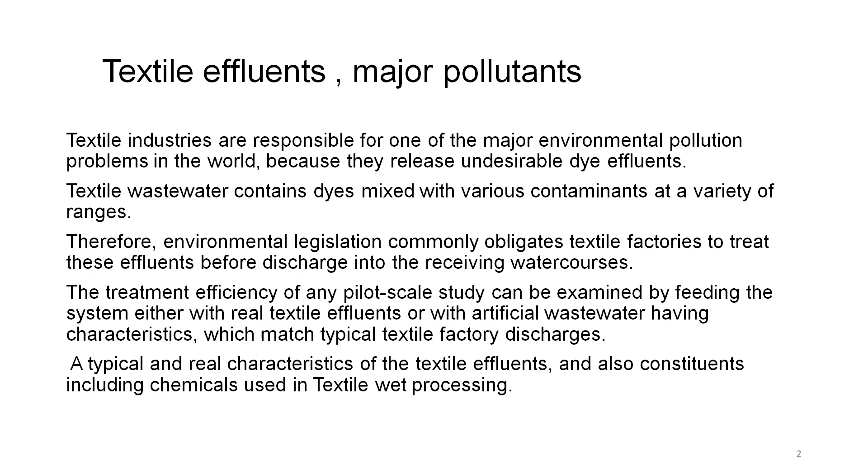A typical and real characteristic of textile effluents and also the constituents including chemicals used in textile wet processing. So, what it means is that all the chemicals that are used in the wet processing, the remnant of that which is discharged in the wastewater needs to be addressed, and those are the major pollutants and they have to be taken into account.

Textile wet processing. As textile industry is one of the largest industries in the world, and different fibers such as cotton, silk, wool as well as synthetic fibers are all pre-treated, processed, colored and after treated using large amounts of water and a variety of chemicals, there is a need to understand the chemistry of the textile effluents very well. Only when we understand the chemistry of the textile effluent, then only we can think of its remediation or any kind of treatment that is required before they are discharged from the factories.

Every country is aiming at common effluent treatment plants for the development of zero discharge solution for the bleaching and dyeing units. The total effluent treatment capacity is designed based on the mill size, based on the effluents generated in these mills. So, there are two major factors. One is the mill size and the other is the type of textile effluent that is discharged from each of these mills, because the chemical processing or the wet processing in every mill is not alike.

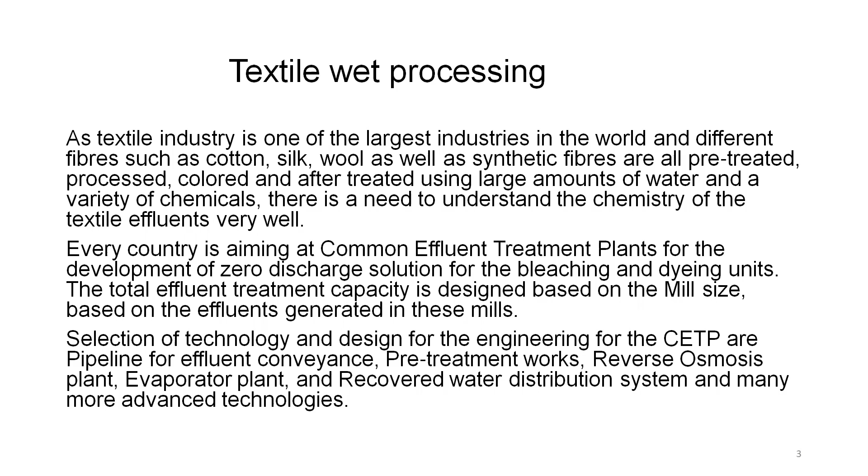You cannot say that all CETPs work on the same principles, but more or less the effluent has to be run into pre-treatment works, then reverse osmosis should be taking place, there should be an evaporator, and there should be a system for recovery of the water, and so many advanced technologies are adapted for all this.

Now, understanding textile waste characteristics is very important at this stage. The textile waste characteristic needs to be understood very clearly. Different methods and aspects of textile effluent and its management to save the environment from pollution need to be understood very clearly. Major pollutants in textile wastewaters are high suspended solids, chemical oxygen demand, heat, color, acidity, and other soluble substances whose chemistry will be emphasized.

So, one thing has to be understood, that first we have to understand what are the high suspended solids, that is the total suspended solids, TSS, and the chemical oxygen demand, the COD, because these are two major factors which are the main pollutants, and then of course comes the heat, color, acidity, and so on.

The pollutant features of textile waste differ widely among various organic substances such as dyes, starches, and detergents in effluent, which undergo chemical and biological changes which consume dissolved oxygen from the receiving stream and destroy the aquatic life. So, they use the oxygen which is dissolved in the water bodies, thereby not making it available for aquatic animals in that water stream, and therefore they start dying, and that is how the aquatic life gets destroyed.

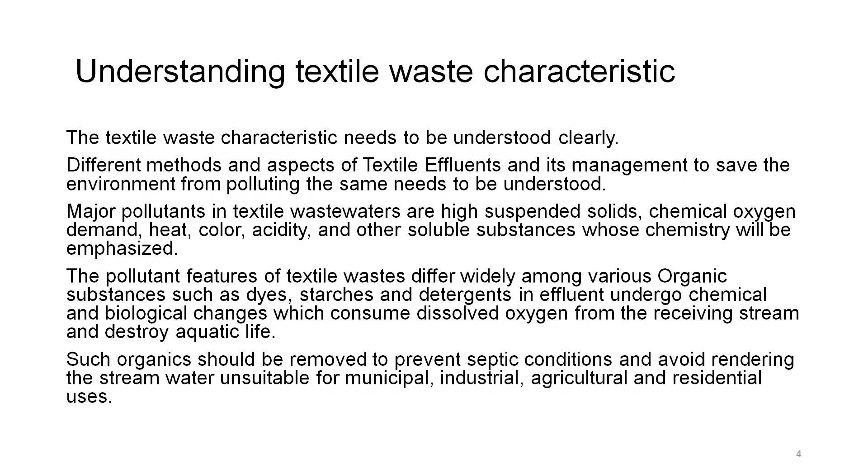Such organics should be removed to prevent septic conditions and avoid rendering the stream water unsuitable for municipal, industrial, agricultural, and residential uses. So, we have to keep in mind that as long as these dyes are present, or these detergents are present, or these starches are present in the effluent, they are not going to let the dissolved oxygen be available for aquatic life, and therefore they will create a septic condition, and the water will not be suitable for municipal or industrial or agricultural or residential uses.

Now, let us understand what are the harmful chemicals that are used in textile industry. The common question would be, why do we use them? We use them because they are mandatory to be used for certain wet processes. Hence, we cannot eliminate them completely. However, we can reduce the quantities or look for a remediation in the effluent.

So, among the list of harmful chemicals that are used in textile industry, detergents, mainly nonyl phenol ethoxylates, generate toxic metabolites which are poisonous to fish. Stain removers carry solvents like carbon tetrachloride, which can cause ozone depletion. Oxalic acid used for rust stain remover is toxic to aquatic organisms, and also they boost the COD, that is the chemical oxygen demand.

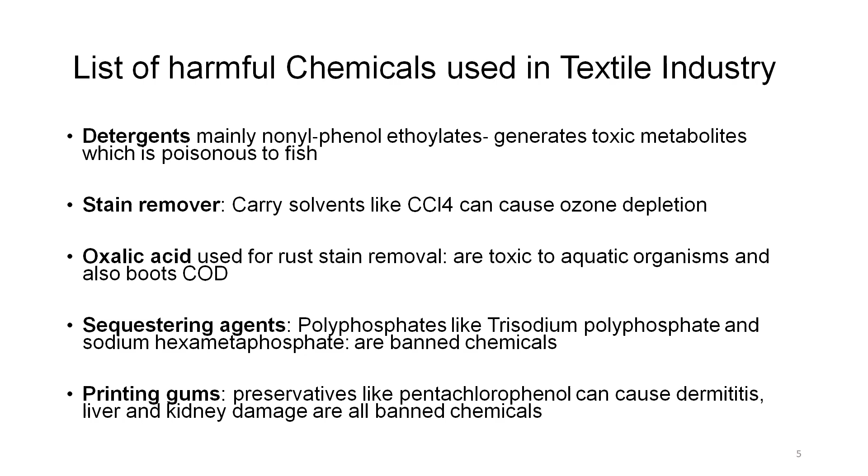Sequestering agents like polyphosphates of the type trisodium polyphosphate and sodium hexametaphosphate are banned chemicals, yet they have to be sometimes used. Printing gums, preservatives like pentachlorophenol can cause dermatitis, liver and kidney damage, and are also banned chemicals, but sometimes these chemicals have to be used.

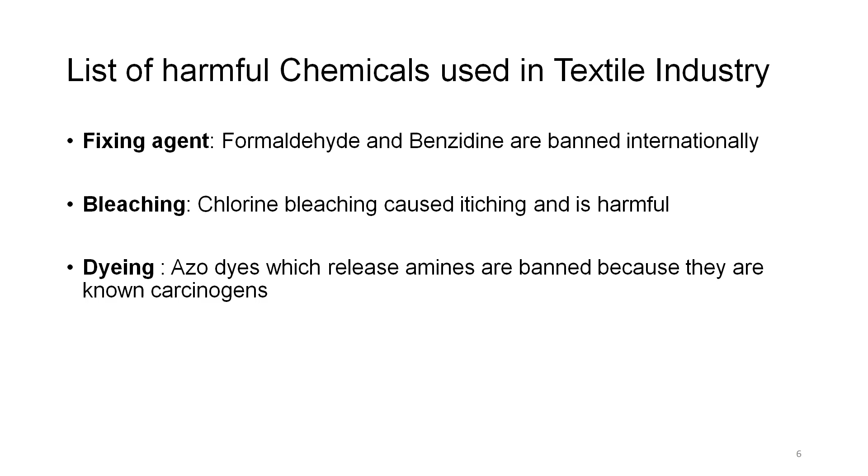Among the other list of harmful chemicals are fixing agents. In the category of fixing agent, formaldehyde and benzidine, which are banned internationally, are also very crucial. Bleaching agents like chlorine bleach can cause itching and are harmful. Dyes, the azo dyes which release amines, are banned because they are known carcinogens. And why are they known carcinogens? Because they release primary amines after the breaking of the azo N double bond N, and these amines are highly toxic.

Textile effluent or wastewater, we will call it in abbreviation TWW. Textile wastewater is one of the most important hazardous wastewaters for ecosystems when it is discharged directly into water streams without proper treatment. Textile effluent is heavily contaminated with pollutants such as dyes, dissolved solids, suspended solids and toxic metals. The main factor to be considered in textile effluent is the total dissolved solids, that is TDS. Because of the use of common salt and Glauber's salt, the level of TDS increases in textile wastewater.

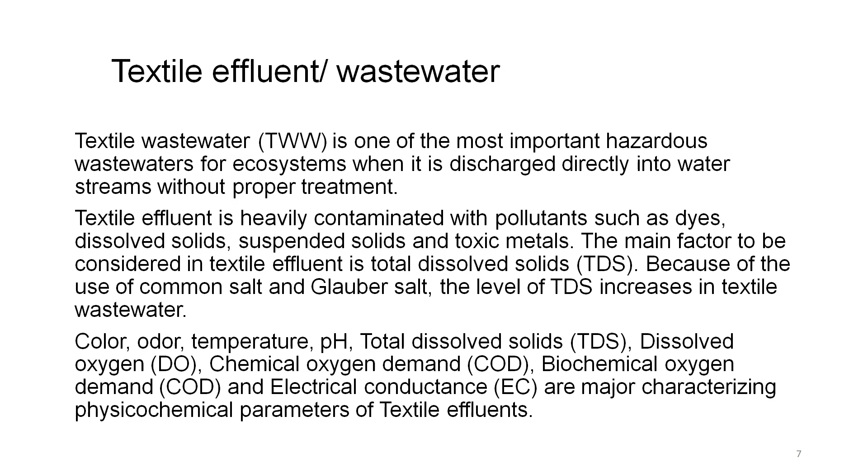Color, odor, temperature, pH, total dissolved solids (TDS), dissolved oxygen (DO), chemical oxygen demand (COD), biochemical oxygen demand (BOD), and electrical conductance (EC) are major characterizing physicochemical parameters of the textile effluents, which need to be tested before this water is discharged into the water bodies.

Now, what is textile effluent? Let us try to understand very carefully the meaning of that and what textile effluent brings along with it, its characteristics. Textile effluent refers to wastewater discharged from textile manufacturing processes. It contains various chemical substances, dyes and pollutants derived from the production of textiles, including fabric, garments and other textile products. So, any type of textile product will have to go through wet processing, and if it goes through wet processing, it is bound to generate textile effluent. So, if we are making fabric or garments or textiles for any other use, textile effluent will be generated.

Textile effluent is a significant environmental concern due to its potential to pollute water bodies, harm aquatic ecosystems and pose risk to human health. The key aspect related to textile effluent is its composition: textile effluent comprises a complex mixture of organic and inorganic compounds, including dyes, heavy metals, solvents, salts, acids, alkalis and other chemicals used in textile processing. These substances can have detrimental effects on the environment and human health if not properly treated before discharge. So, it is a very serious matter. These chemicals, although very useful in textile processing, can be extremely harmful to human health.

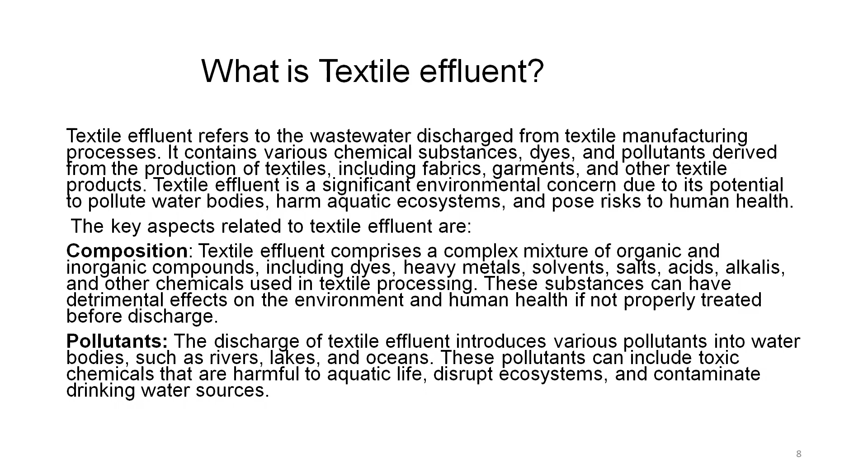Then come the pollutants. Textile effluent, when discharged, introduces various pollutants into water bodies such as rivers, lakes and oceans. These pollutants can include toxic chemicals that are harmful to aquatic life, disrupt ecosystems and contaminate drinking water sources as well as sometimes soils.

Environmental impact caused by TWW, that is textile wastewater. Textile effluent contributes to water pollution, which can have far-reaching environmental consequences. It can degrade water quality, affect biodiversity, disrupt aquatic ecosystems and harm organisms which are living in or are dependent on the affected water bodies like the river, the ocean and the lake.

Health risk: exposure to untreated textile effluent or contaminated water sources can pose health risks to both humans and animals. Chemicals present in textile effluent such as heavy metals and dyes may have toxic effects and can accumulate in the environment and food chain, potentially causing adverse health effects. So, it has serious implications. We cannot take this lightly, and hence understanding the nature and characteristics of textile effluent is very important.

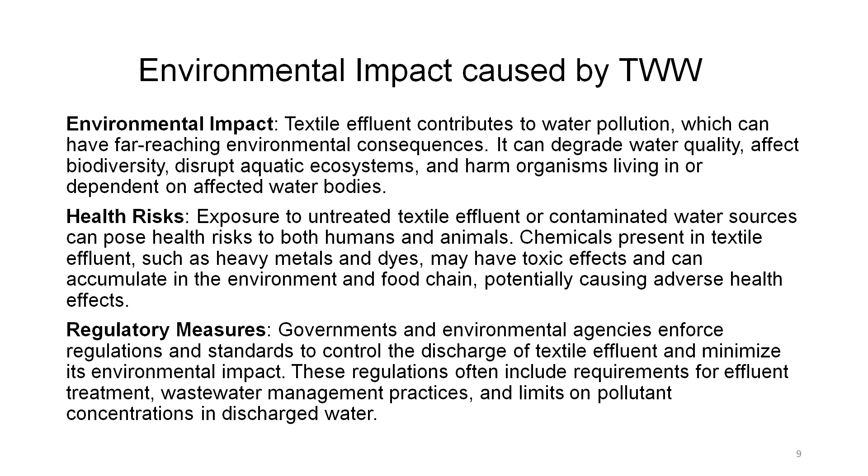Regulatory measures: governments and environmental agencies enforce regulations and standards to control the discharge of textile effluent and minimize its environmental impact. These regulations often include requirements for effluent treatment, wastewater management practices and limits on pollutant concentration in discharge water. So, they have made rules as to what is permissible, how much should be remaining in the water before it is discharged. That is, there is a stipulated value for each of these chemicals which are known pollutants in the effluent. Then only we can think of treatment technologies.

So, there are several treatment technologies. Various treatment technologies are available to treat textile effluent before discharge. These include physical, chemical and biological processes aimed at removing or neutralizing pollutants and contaminants present in the wastewater. Common treatment methods include sedimentation, filtration, chemical precipitation, biological treatment such as activated sludge processes, and advanced oxidation processes.

So, newer and newer methods are being developed for the treatment of textile effluent, because as long as man exists on this earth, textiles will be required, textile processing cannot be stopped, and textile processes are going to use chemicals which are eventually harmful for humans or even animals.

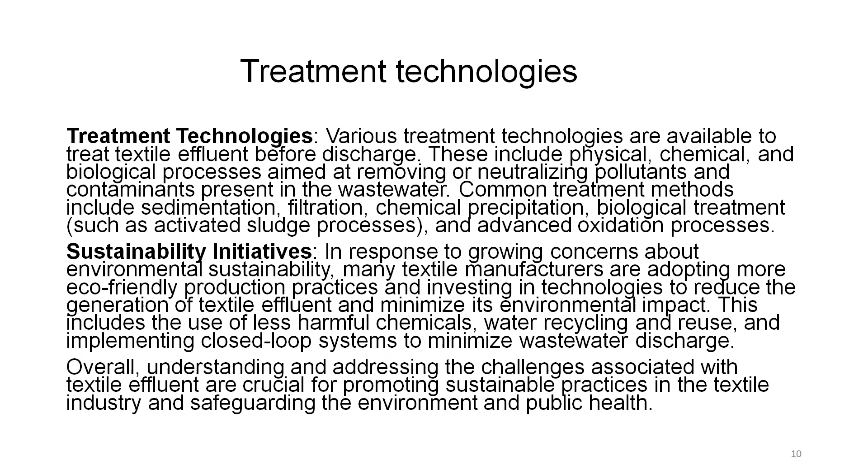So, in order to understand this, one thing is clear, that treatment technologies and sustainability initiatives have to be done, because then only these contaminants can be overcome and removed. The wastewater characteristics of textile effluent should be understood, and in order to understand, let us go one by one.

The wastewater characteristics of textile effluent can vary depending on the specific processes involved in textile manufacturing, as well as factors such as types of fibers, dyes and chemicals used. However, textile effluent typically exhibits certain common characteristics. That means we have certain common characteristics which are always present in textile effluent, and there are some specific chemicals which are used for specific processing. Let us first look at the typical common characteristics of textile effluent.

One is color. Textile effluent is often highly colored due to the presence of residual dyes and pigments from dyeing and printing processes. The color intensity can range from pale hues to vibrant shades depending on the type and concentration of dyes used. And this is very apparent. One can look at the effluent and say, okay, it is very highly colored or less colored.

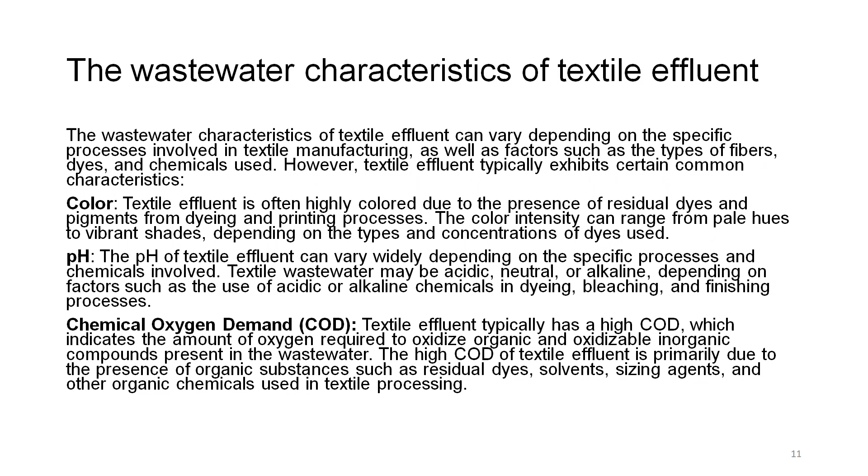Main parameters that need to be checked: biochemical oxygen demand, BOD. BOD measures the amount of dissolved oxygen consumed by microorganisms while decomposing organic matter in the wastewater. Textile effluent often has high BOD due to the presence of biodegradable organic compounds such as starches, sugars and cellulose derived from natural fibers and processing chemicals. Then comes total suspended solids, TSS.

Textile effluent may contain suspended solids such as fiber, lint, dye particles and other particulate matter generated during various manufacturing processes. TSS levels can vary depending on factors such as the type of textile production, equipment used and wastewater treatment practices.

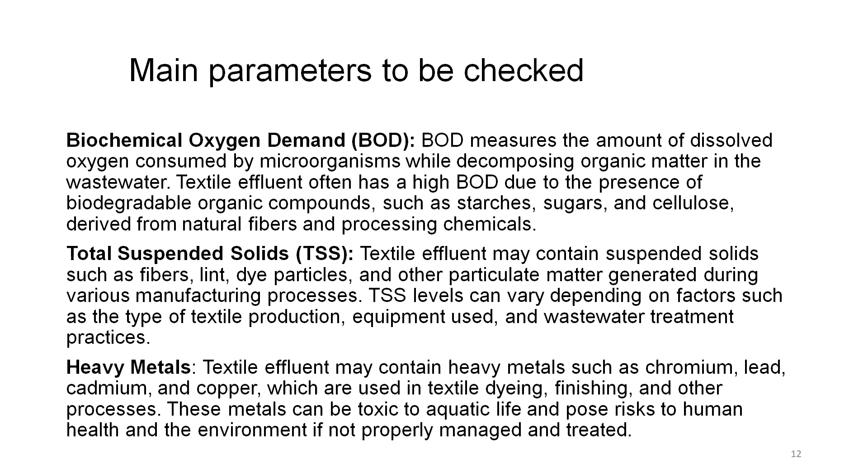Heavy metals. Textile effluent may contain heavy metals such as chromium, lead, cadmium and copper, which are used in textile dyeing, finishing and other processes. These metals can be toxic to aquatic life and pose risk to human health and environment if not properly managed and treated. So, this is quite serious because heavy metals are going to create even more serious problems in the textile effluent, particularly for aquatic life as well as for human health. They damage the environment terribly.

Salinity and TDS. Salinity and total dissolved solids, that is the TDS, in textile effluent may have elevated levels of salts and dissolved solids, particularly if salt based chemicals such as sodium chloride are used in processes like dyeing and printing. Often as an equilibrating agent, sodium chloride is added during dyeing. High salinity and TDS levels can affect water quality and soil fertility if discharged untreated into the environment.

Toxic chemicals. Textile effluent may contain various toxic chemicals such as formaldehyde, chlorinated compounds, aromatic amines and other hazardous substances used in textile processing. These chemicals can pose risk to human health and environment if not properly controlled and treated. So, again and again I am bringing up this problem of human health and environmental damage due to textile effluent. It is a serious matter and we need to understand the characteristics and the nature of textile effluent in order to find a solution.

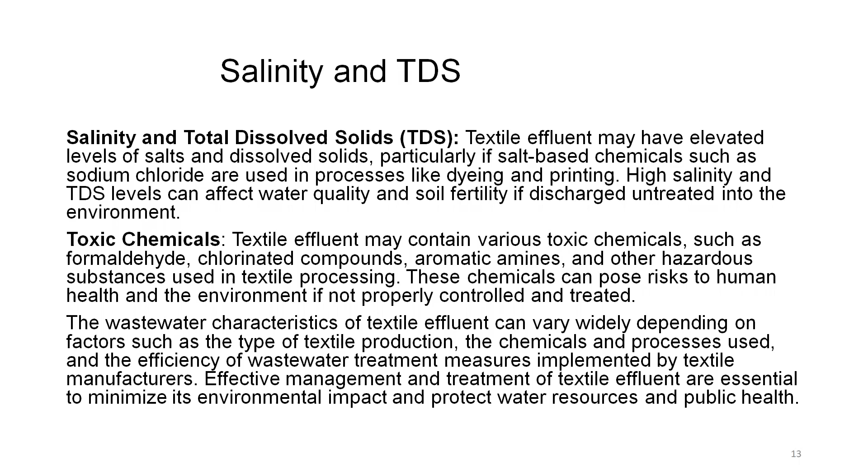The wastewater characteristics of textile effluent can vary widely depending on factors such as the type of textile production, the chemicals and processes used, and the efficiency of wastewater treatment measures implemented by textile manufacturers. So, what it means is that any textile manufacturer will now have to look at wastewater treatment measures more seriously than before because of the legislation laid down by the Environmental Ministry. Effective management and treatment of textile effluent are essential to minimize its environmental impact and protect water resources and public health.

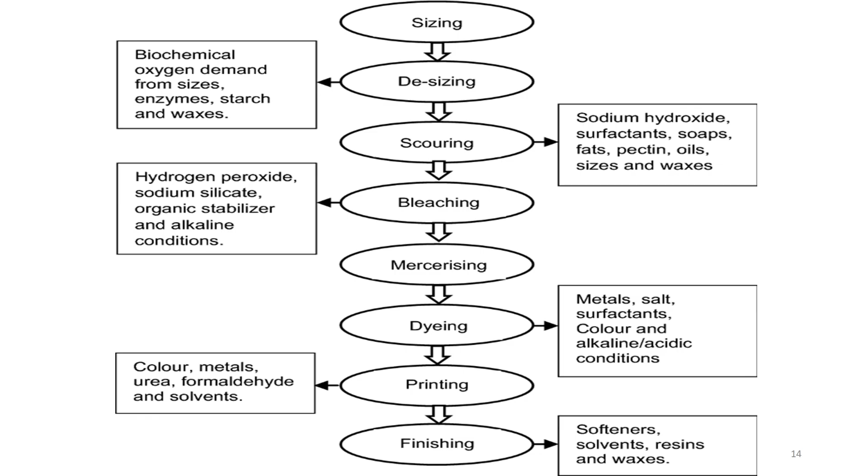In dyeing, we have metals, salt, surfactant, colors and alkaline or acidic conditions. In printing, we have color, metal, urea, formaldehyde and solvents, and as finishing agents, we have softeners, solvents, resin and waxes. So many different varieties of chemicals are used in the wet processing of textiles. Hence, the composition of textile effluent is to be understood from the mill's production point of view. The effluent discharged from textile factories is a mixture of dyes, metals and other pollutants.

The colorants can be divided into natural and synthetic dyes. Synthetic dyes are produced easily in different colors and characterized by their fastness, which makes them more widely used than natural dyes. Synthetic dyes are classified according to their chemical structure, that is azo, anthraquinone, sulfur, phthalocyanine and triarylmethane, and according to their mode of application they can be reactive dyes, direct dyes, disperse dyes, basic dyes or vat dyes.

Dye effluents are high in color, pH, suspended solids, that is SS, chemical oxygen demand, that is COD, biochemical oxygen demand, that is BOD, and salts. So, this is more or less the composition of textile effluent. One component may be higher, another lower, from mill to mill, but in general the dye effluent will be colored. It could be highly colored or less colored, it will have pH, it will have suspended solids because of the dissolved and suspended solid material, and it will have high COD and BOD. These are more or less the common characteristics of textile effluent composition.

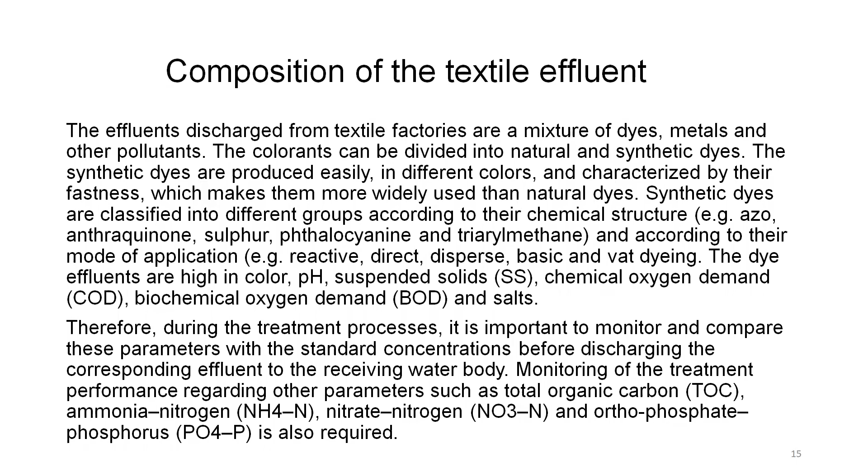Therefore, during the treatment processes, it is important to monitor and compare these parameters with the standard concentrations before discharging the effluent to the receiving water body. Monitoring of treatment performance regarding other parameters such as total organic carbon, that is TOC, ammonia nitrogen, NH4-N, nitrate nitrogen, NO3-N, and orthophosphate phosphorus, PO4-P, is also required simultaneously.

Textile wastewater problem. Treatment of this is very important. If we do not treat the textile wastewater, it will definitely increase the waste. Hence, we need to treat the wastewater, which will reduce, prevent and make positive effects on its further uses. It can be recycled if it is purified enough and if it does not have any

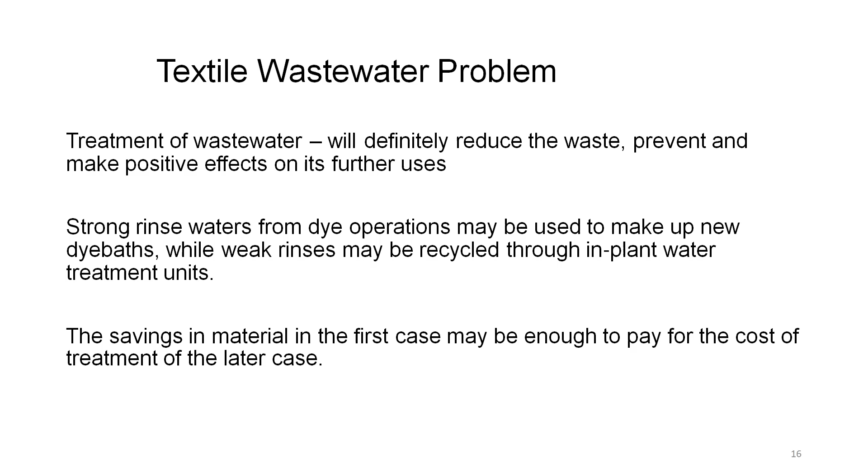color remnants. Strong rinse water from dye operations may be used to make up new dye bath, while weak rinses may be recycled through in-plant water treatment units. So, depending on whether they are high in color or low in color, their recycling or treatment strategies can be changed. The savings in material in the first case may be enough to pay for the cost of the treatment of the latter case, which means that whatever money is involved in recycling can be compensated if we use the highly colored discharges for making new dye baths and adjusting the color concentration through color scan machine.

Chemicals that are used in textile industry, that is synthetic organic dyes, bleaching and detergents. Some chemicals are biodegradable such as starch, however, others such as dyes are non-degradable. Thus, the effluent could have lower dissolved oxygen concentration, which means they will cause higher BOD and COD. Solids in textile wastewater come from fibrous substrates and process chemicals, thus disturb the aquatic life by slowing oxygen transfer

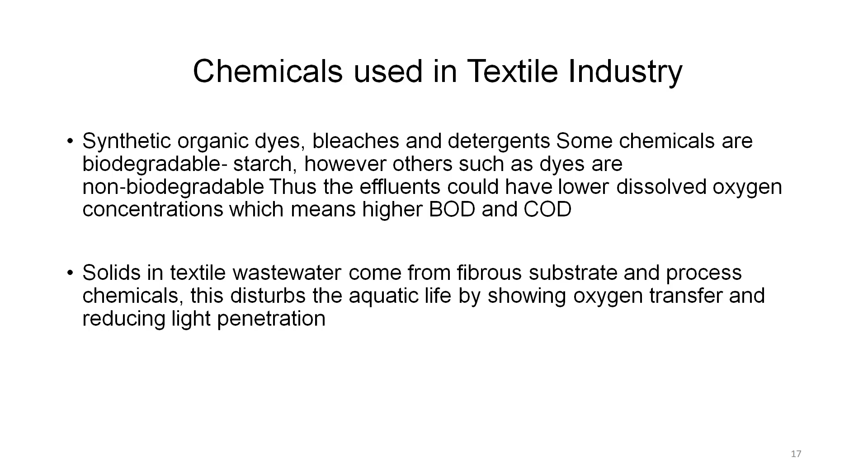and reducing light penetration. So, if the water has too much of dissolved solids, it will not let the sunlight penetrate through the water body. As a result, aquatic plants may not get enough light to carry out their photosynthesis, and therefore, they will die or they will become pale. Therefore, it is necessary that the salt should be removed, the TSS should be lowered.

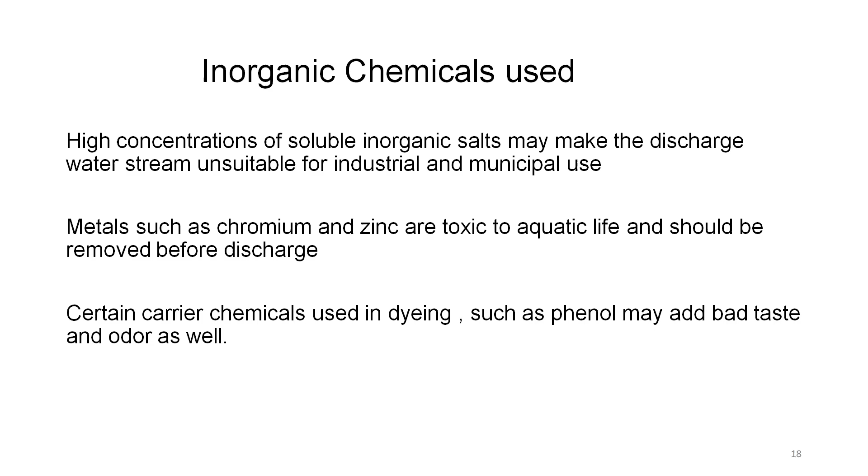Inorganic chemicals used. High concentration of soluble inorganic salts may make the discharge water stream unsuitable for industrial and municipal use. Metals such as chromium and zinc are toxic to aquatic life and should be removed before discharge. Certain carrier chemicals used in dyeing such as phenol may add bad taste and odor. So, we have to see what are the chemicals that can be reduced if not removed completely from the processing system.

Therefore, we understand that treatment of textile effluent is mandatory, is essential. Typically, textile effluent would involve the following steps. Reactive dye concentrates can be treated in a conventional anaerobic digester. Exposure to the biomass to achieve decolorization and tolerance of microorganisms to concentrations of the dye. So, there are methods of treatment, but the method of treatment has to be chosen according to the kind of composition of the effluent that is present.

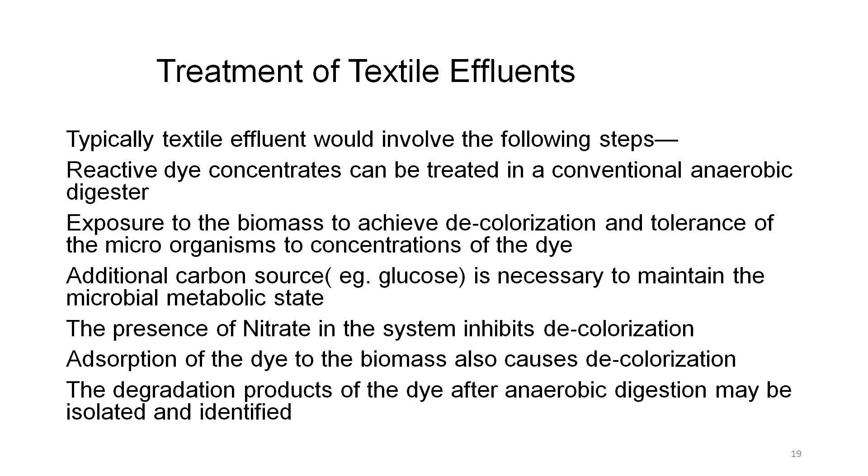Additionally, carbon source such as glucose is necessary to maintain the microbial metabolic state. The presence of nitrate in the system inhibits decolorization. Adsorption of dye to the biomass also causes decolorization. The degradation products of the dye after anaerobic digestion may be isolated and identified. So, there is more complexity to it. It is not so simple to remove all these very easily with a twist of the finger. It is not like magic. It needs concerted planning, and the treatment plan is based on the composition of the textile effluent of that mill. There is no universal formula.

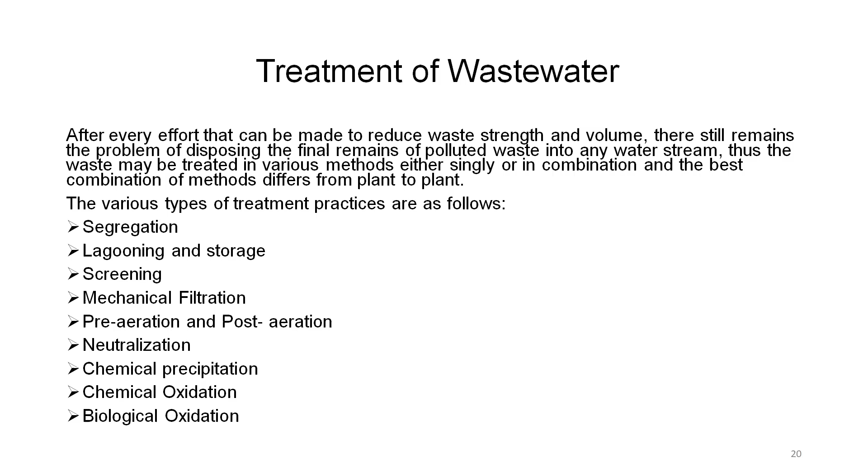So, in the treatment of the wastewater, after every effort that can be made to reduce waste strength and volume, there still remains the problem of disposing the final remains of polluted waste into any water body. Thus, the waste may be treated in various methods, either singly or in combination, and the best combination of methods differs from plant to plant. The various types of treatment practices that are followed are segregation, lagooning and storage, screening, mechanical filtration, pre-aeration and post-aeration, neutralization, chemical precipitation, chemical oxidation and biological oxidation. So, one can choose one of the methods, or one can use several of the methods. That discretion is left based on the composition of the textile effluent.

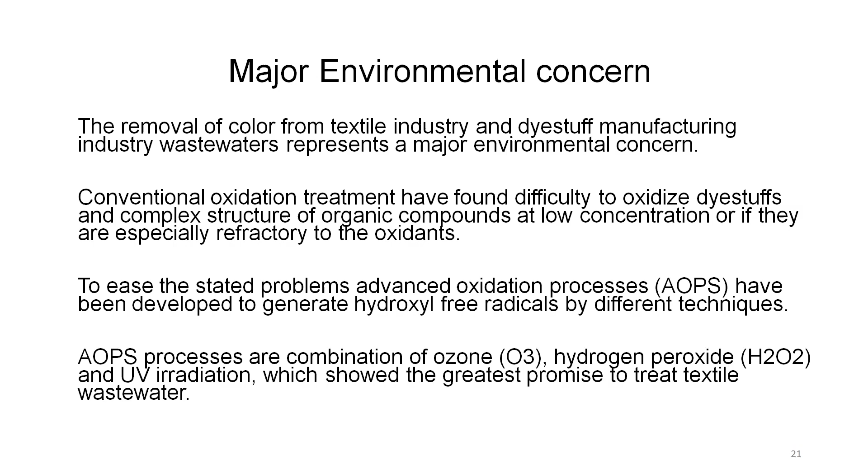Major environmental concern: the removal of color from the textile industry and dyestuff manufacturing industry wastewaters represents a major environmental concern. Conventional oxidation treatments have found difficulty to oxidize dyestuffs and complex structures of organic compounds at low concentration, or if they are specially refractory to the oxidants. To ease the stated problem, advanced oxidation processes, that is AOPs, have been developed to generate hydroxyl free radicals by different techniques. AOPs are combinations of ozone, that is O3, hydrogen peroxide H2O2 and UV radiation, which showed the greatest promise to treat textile wastewater. So, among various processes, the advanced oxidation processes show a lot of promising results in terms of treatment of textile effluent.

Currently, what are the practices which are being practiced in the textile industry to reduce the pollutants in the textile effluent? The textile dyeing industry is under considerable pressure to reduce the color of the process water directly discharged to municipal water treatment facilities. Two common approaches are practiced.

One is the electrochemical treatment by anodic oxidation, using anodes with catalytic coatings to oxidize the dye waste, and the second one is ion exchange zeolite treatment with different cations such as Fe2+, Fe3+, Cu2+; clinoptilolite, a natural zeolite, has been found to be quite effective.

Since the catalytic Fe2+ sites are bound to the zeolite structure, no sludges are formed, and the cations released to the solution during the organometallic dye degradation were found to be absorbed by the zeolite. So, here there is an advantage that the zeolite structure is so beautiful that whatever is being precipitated is actually absorbed by the zeolite.

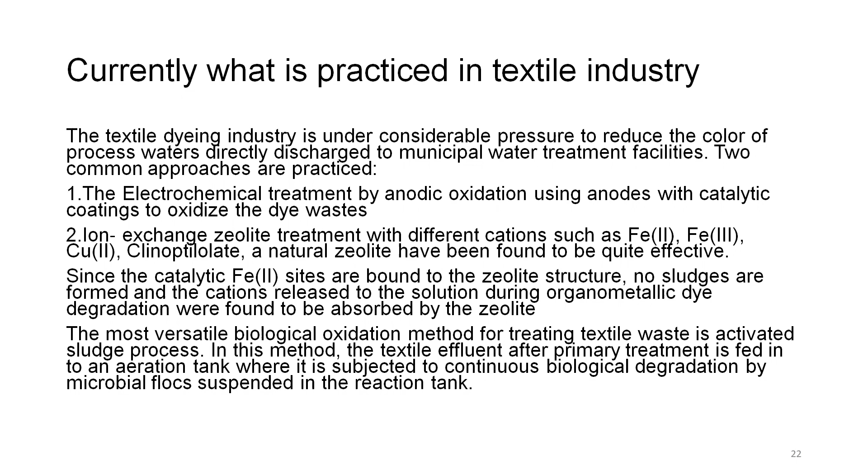Commonly combined for the treatment of effluents. As I stated earlier also, no single process is foolproof, that we do one process and the water will become colorless, odorless, and will have neutral pH and all of the qualities that unused water is having. Therefore, sometimes we have to use a combination of methods.

The textile industry uses a significant volume of fresh water throughout all processing operations, dyeing, bleaching, washing, while it contributes to freshwater pollution during the thorough washing of the fabric to remove chemicals. So, it is contributing continuously; fresh water is not remaining fresh water any more.

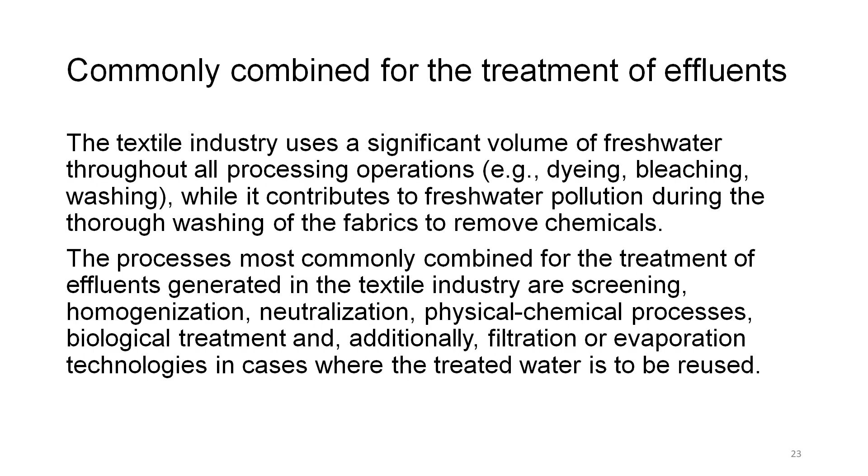The processes most commonly combined for the treatment of effluent generated in the textile industry are screening, homogenization, neutralization, physical and chemical processes, chemical treatment, biological treatment, and additionally filtration or evaporation technologies in cases where the treated water is to be reused. So, there are several techniques one after the other in combination which are used for the treatment of the textile effluent.

A correct design of wastewater treatment system. So, what should be the correct design of the wastewater treatment system for the textile industry? It should meet certain objectives: adapt the wastewater to the discharge limits. This is being set up by the regulatory body.

Reuse water in different textile manufacturing processes, that is washing, dyeing, heat treatment, as well as for cleaning operations, irrigation, etc. To recover raw material dissolved in the wastewater such as pigments or dyes, to reduce operating costs of the production process, to reduce the environmental impact of the business activities. So, all put together, it becomes a good or a correct design for a wastewater treatment system.

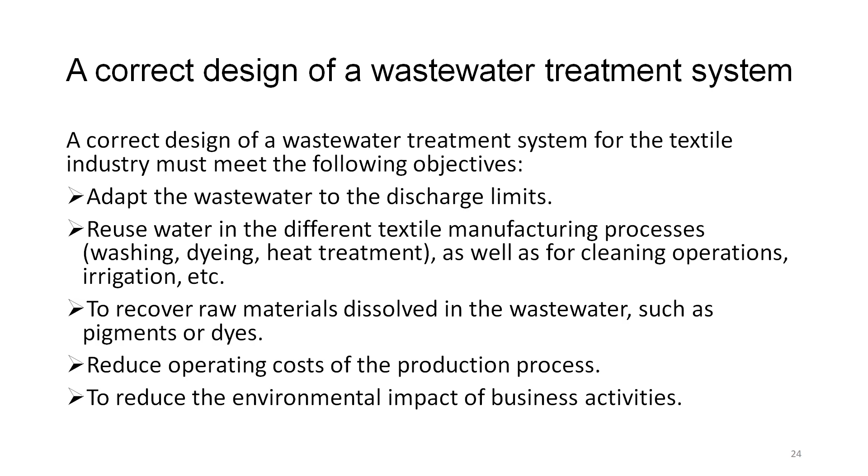Now, what is the main culprit? Which one is the most difficult to be removed? The plants for the treatment of wastewater generated in the textile industry involve various technologies, since the diversity of pollutants present in the effluent cannot be treated by a single technology. This we have understood so far.

Wastewater from the textile industry is characterized by the large amount of reagents applied in its production processes, most of which are non-biodegradable and persistent in the medium, especially the aqueous medium. The pigments used are highly contaminating agents, as they are manufactured to offer high durability and resistance to biological degradation.

Up to 200,000 tons of pigments and colorants can be lost annually in the manufacturing process if the water is not efficiently treated. It is for this reason that it is increasingly important to implement circular economy solutions that enable the reuse of wastewater and the recovery of raw material dissolved in effluents.

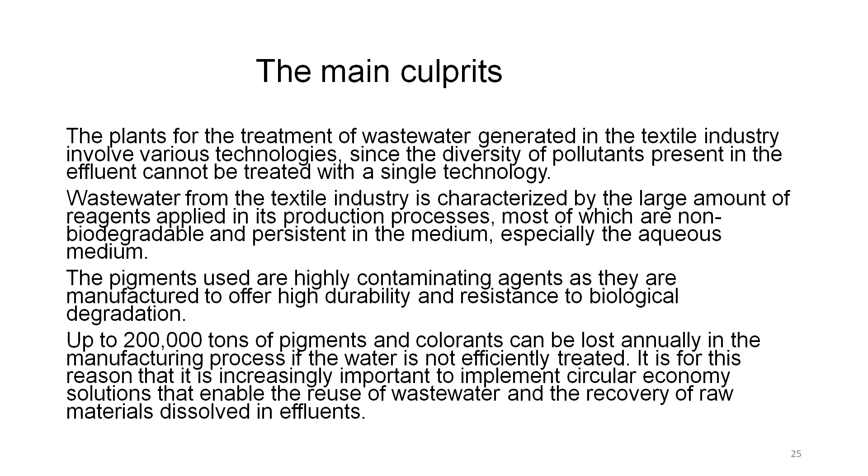Now, this is a very serious issue, that such a large amount of pigments and colors are still remaining in the textile effluent, and if they are not recovered, we definitely cannot talk about circular economy. And in today's time, every bit of restoration can change the entire business model of that mill, and therefore, it is very important to look at the recovery of these chemicals which can be reused in due course of time. So, what are the types of textile wastewater treatment?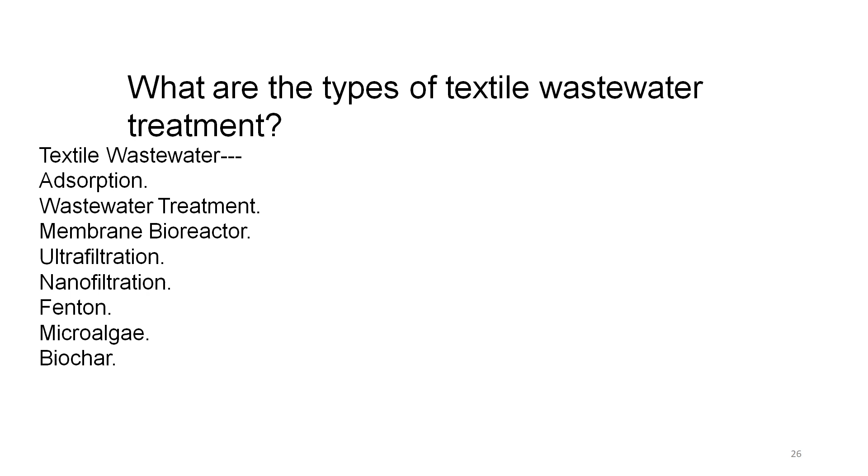Textile wastewater can be treated by adsorption, wastewater treatment, membrane bioreactor, ultrafiltration, nanofiltration, Fenton oxidation, microalgae and biochar. So, these are various different types of treatments that are commonly practiced either in isolation or in combination.

How can you reduce the usage of water in textile production sustainability? Now, there are two things: either we use large amount of wastewater and recover it, or we use water sparsely so that less effluent is generated, less treatment is required. Choose low water fabrics, use waterless dyeing methods, recycle and reuse water, implement water management practices, educate and engage stakeholders. Here is what else to consider.

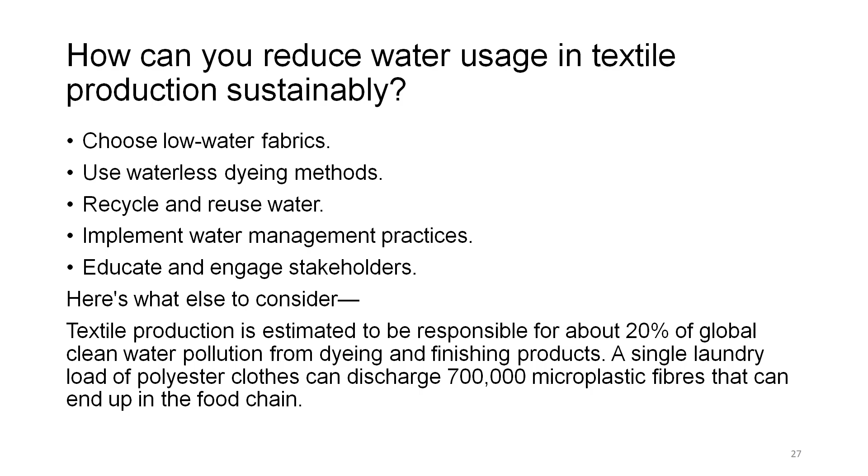Textile production is estimated to be responsible for about 20% of global clean water pollution from dyeing and finishing products. A single laundry load of polyester clothes can discharge 700,000 microplastic fibers that can end up in the food chain. So, you imagine that such is the manifestation of the textile effluent, and if it is not managed, it can be a serious environmental problem.

Use waterless dyeing methods. Dyeing is one of the most water intensive stages of textile production, as it involves rinsing, washing and disposing of wastewater that contains chemicals and pollutants, and the processing chemicals. However, there are alternative methods that can reduce or eliminate the need of water in dyeing, such as air dyeing, digital printing or supercritical carbon dioxide dyeing.

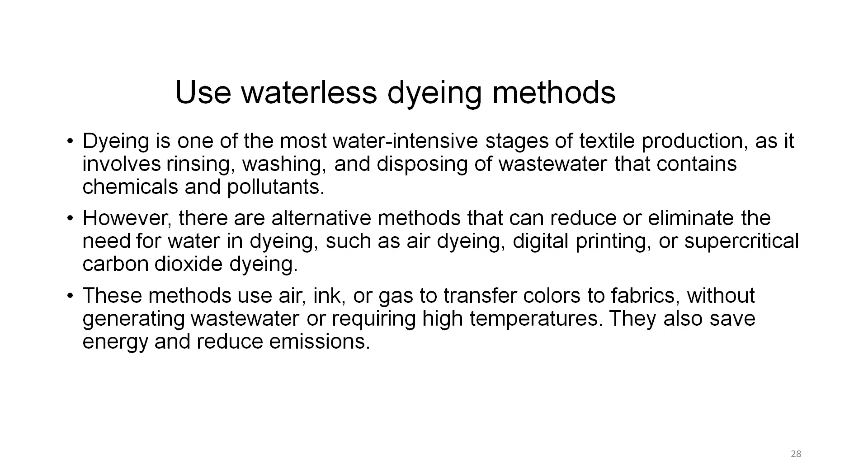Now, here the water demand itself is very low. Therefore, very small amount of effluent will be generated, or there will not be any effluent generated at all. These methods use air, ink or gas to transfer colors to the fabric without generating wastewater or requiring high temperatures. They also save energy and reduce emission. So, switching to waterless dyeing methods is definitely advantageous in reducing the textile effluent water pollution.

Implement water management practices. Besides using less water or reusing water, you can also implement water management practices that can help you monitor and optimize your water consumption and efficiency. For example, you can conduct a water audit to assess how much water you use, where you use it and how you can reduce it. You can also set water reduction targets and track your progress.

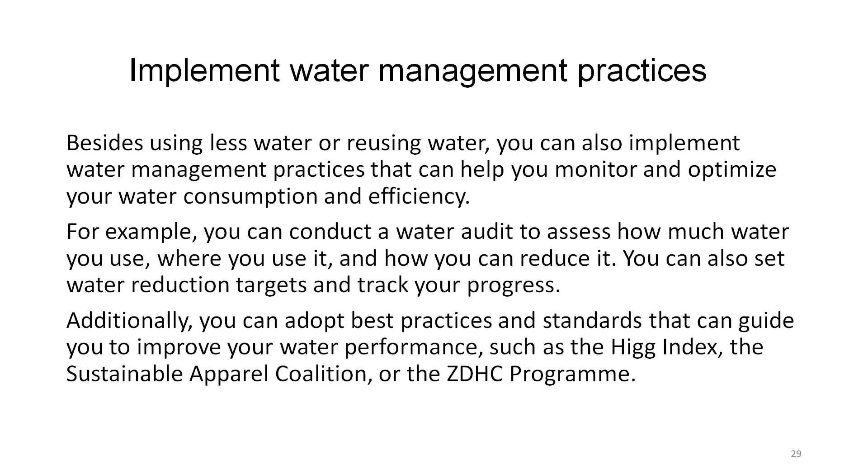Additionally, you can adopt best practices and standards that can guide you to improve your water performance, such as Higg Index, the Sustainable Apparel Coalition, or the ZDHC program, that is Zero Discharge program. Guide to Improve Water Program. Higg Index. Higg Index is a suite of 5 tools that assess and measure the social and environmental performance of the value chain and the environmental impact of products. We develop these tools to help organizations make systematic change by identifying, understanding, and measuring areas of improvement.

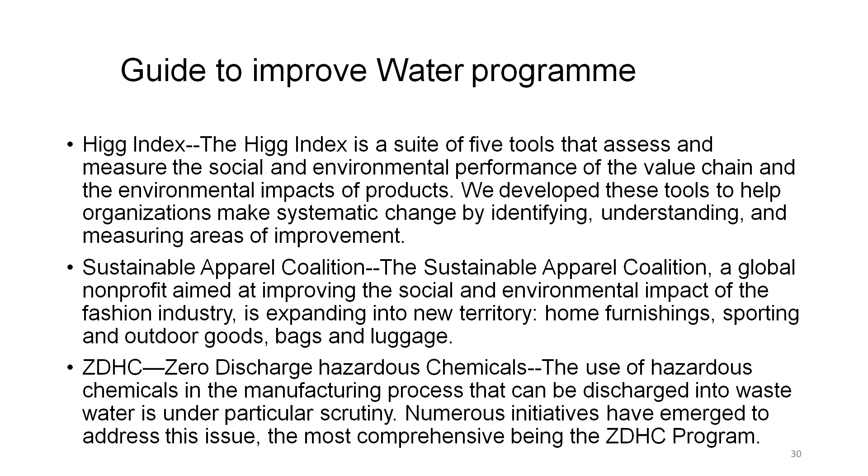Sustainable Apparel Coalition. The Sustainable Apparel Coalition, a global non-profit aimed at improving the social and environmental impact of the fashion industry, is expanding into new territory: home furnishing, sporting and outdoor goods, bags and luggage. Zero Discharge of Hazardous Chemicals, that is ZDHC. The use of hazardous chemicals in the manufacturing process that can be discharged into wastewater is under particular scrutiny. Numerous initiatives have emerged to address this issue, the most comprehensive being the ZDHC program.

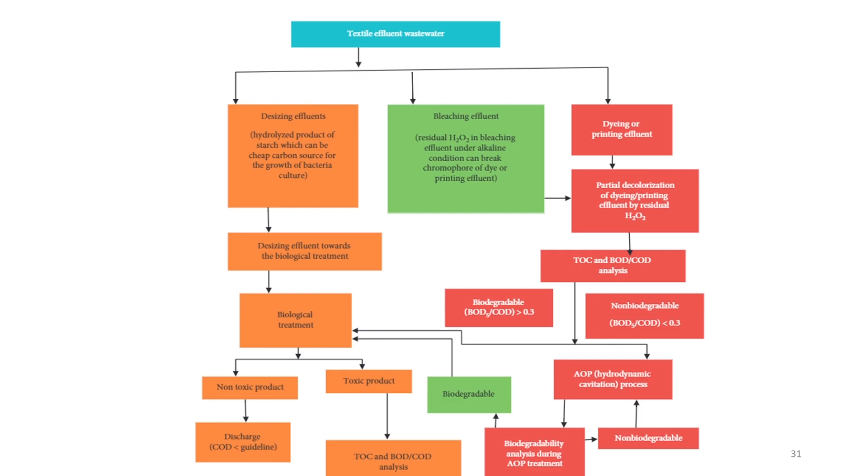So, this is the kind of layout where you have effluent from desizing, from bleaching, from dyeing, and then they are treated differently, but the most effective one is the AOPs, which is the advanced oxidation processes, and through that we get biodegradable and non-degradable products, which then finally need to be checked and removed. So, design appropriate wastewater treatment technologies which are removing effluent from the wastewater of textile factories to mitigate water pollution.

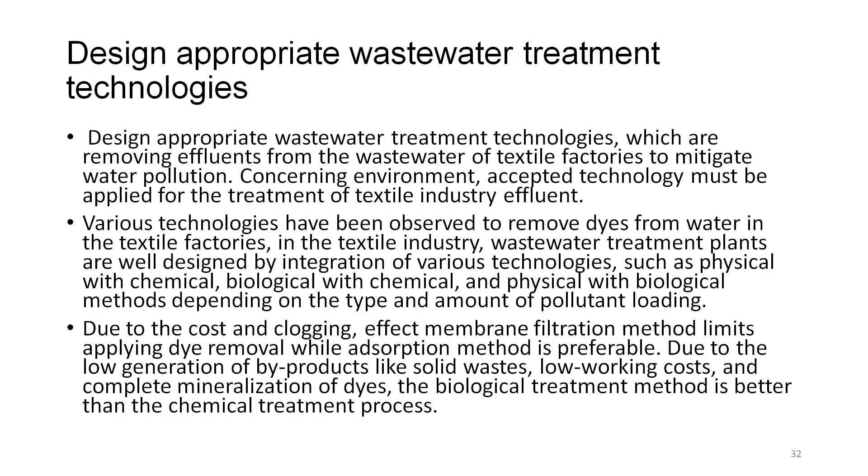Concerning environment, accepted technology must be applied for the treatment of textile industry effluent. Various technologies have been observed to remove dyes from water in the textile factories. In the textile industry, wastewater treatment plants are well designed by integration of various technologies such as physical and chemical, biological with chemical, and physical with biological methods, depending on the type and amount of pollutant load. Due to the cost and clogging, effective membrane filtration is limited in dye removal, while the adsorption method is preferable. Due to the low generation of byproducts like solid waste, low working costs, and complete mineralization of dyes, the biological treatment method is better than the chemical treatment method.

Hence, we come to the conclusion that there has to be a good understanding of textile waste characteristics. Major list of chemical pollutants need to be identified. Parameters to check the pollutants. Wastewater treatment strategies have to be made according to the pollutants that are present in that particular effluent. Implement water management practices, guide to improve water program, and design appropriate wastewater treatment plans.